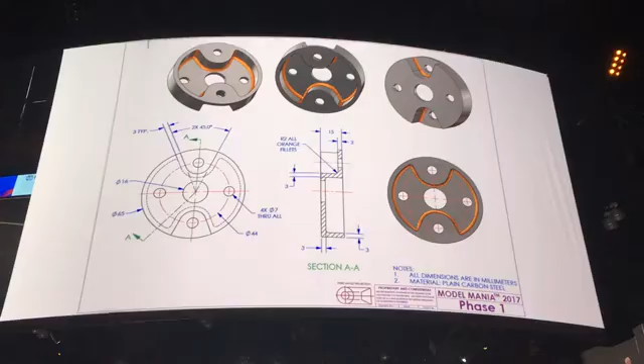This is the model, the phase one part that we give you. So as I mentioned before, we give you a drawing, we ask you to sit down and model the part. Then we'll give you a change to make to that part. So a round part's got a hole in it, 4 holes on the outside, some pockets, and then it's kind of shelled. The constant wall thickness throughout is 3.

So let's take a stab at this thing here. We'll start off with a sketch and just create a couple circles, 65 millimeters, 16 millimeters, and we're going to extrude this. I'm a big fan of using Instant 3D, so I'll just grab that sketch, drag it out 15 millimeters. What we're going to do next is create a sketch on that front plane.

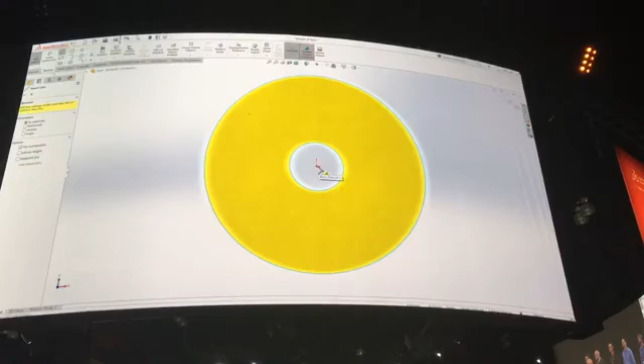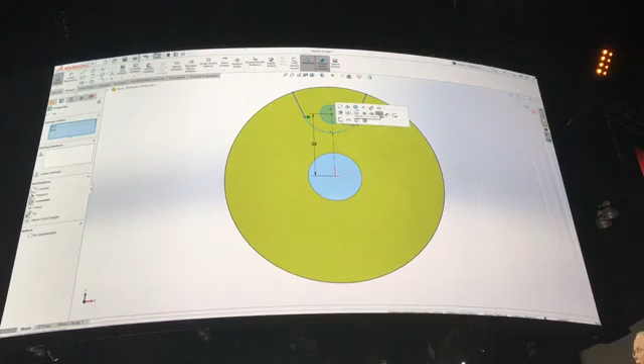I'll use a construction line here, 22, because the bolt circle is 44, and we'll draw a 7 millimeter circle to define the hole. And I'm going to convert that outer edge. That'll help me when I'm establishing relationships while I'm sketching, so this perpendicularity helps me establish that relationship. Transition straight to an arc right off the line command, and then we'll add a concentric relationship. I'll also add a symmetric relationship between the 2 vertical edges there as well.

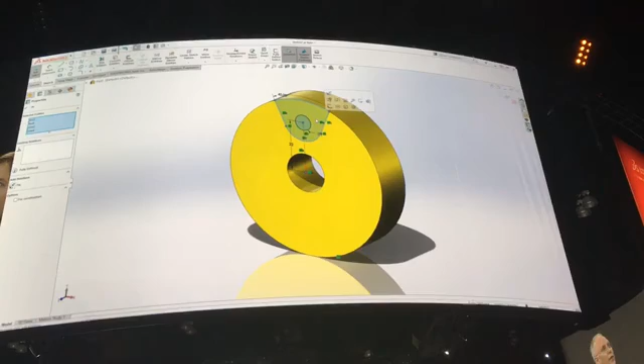Then we'll add our 45 degree dimension, and you don't need a radius on that lower arc there because you can see that that line, because of that perpendicularity, goes through the center. Trim that up, and we'll go ahead and extrude it. I'm using sketch contours, so all I have to do is choose that one outer contour, and I'm able to extrude that right to the back face. Actually, not to the back face, offset from the back face by 3 millimeters.

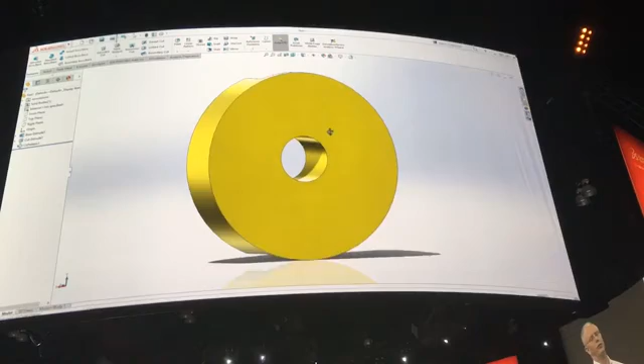So then what we'll do is circular pattern. I'm going to pattern that around to the bottom side too. That's the way I guess to do it. Some people did mirrors, some people did different things. It might have caused some challenges. Here I'm going to shell, so I'm going to shell out the bottom and the hole. That still gives me a 3 millimeter wall, but it gives me everything that I want by shelling that face

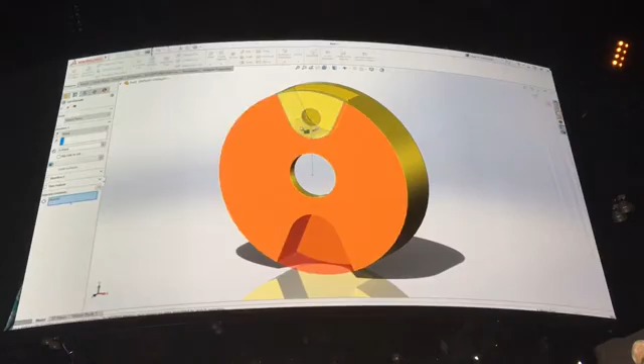to define the hole. Here I'm just going to access, using breadcrumbs, the sketch. So I'm going to access that sketch and then use that contour to extrude that hole through all, and we'll pattern that all the way around to the bottom side, or make 4 of those around to the bottom side.

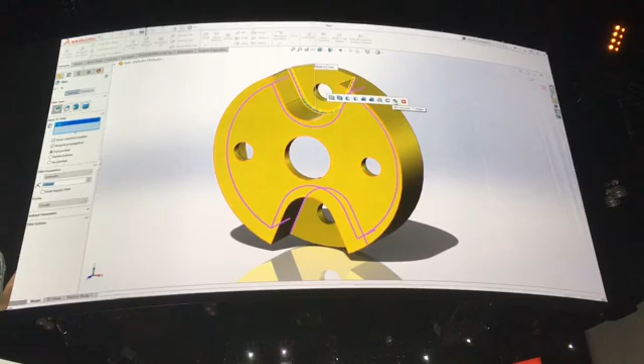All right, fillets. So this is a machine part. If you notice, all the concave edges were filleted. So I'm going to use the selection manager to choose all concave edges. Kind of a one-button click. It allows me to create all those in one shot. I don't have to worry about grabbing a whole bunch of edges or features to fillet that. You don't have to add the color. I like to add the color because it helps me visualize that.

Very important, you got to apply the material. In this case here, plain carbon steel. And that's it, phase 1, done. Pretty simple. I don't know how many features we got, 6, 7, everybody's counting, 7 features, not too bad.

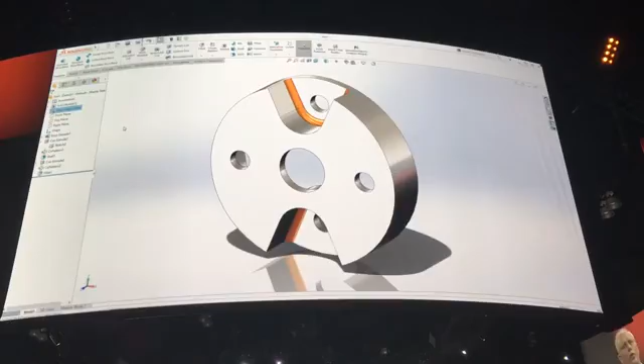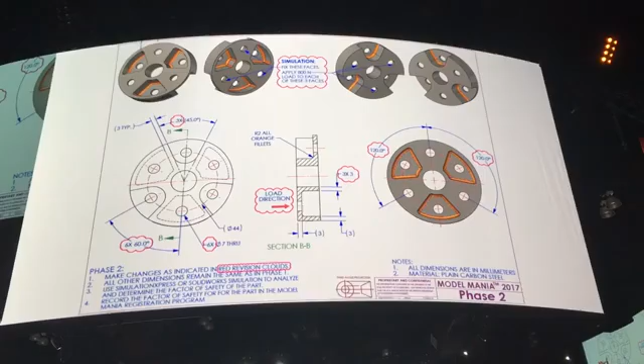So, once you're done with that, we give you this other drawing and say, all right, now you got to make a change to it. 4 holes goes to 6. The pockets that are on the front side here in the lower left view go from 2 to 3, and then the shelling in the back kind of takes place. But if you look at that view on the right, those pockets have the edges that go into the center as straight lines. And when you shell that, you'll see later on a way to get around that.

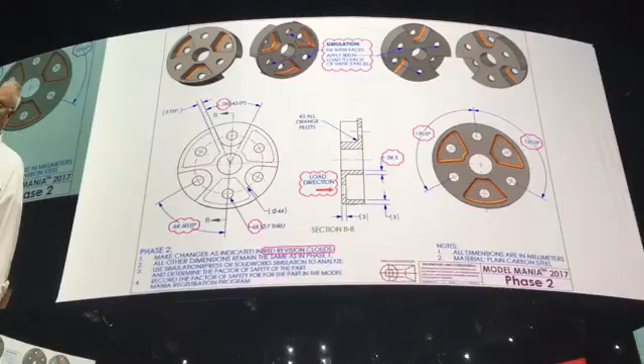And then we define the simulation, which faces to hold and which faces to apply the load. We got those nice bubbles, and we give you the load direction in that center view and the section view. So let's get started on this. Let's go and change the number of holes in the pattern from 4 to 6. No problem, no rebuilds. From 2 to 3 here. No problem, everything still looks pretty good.

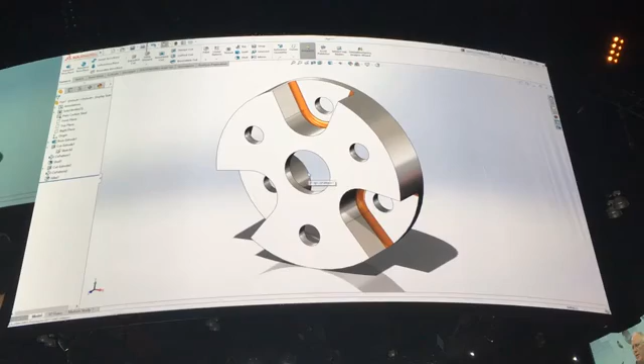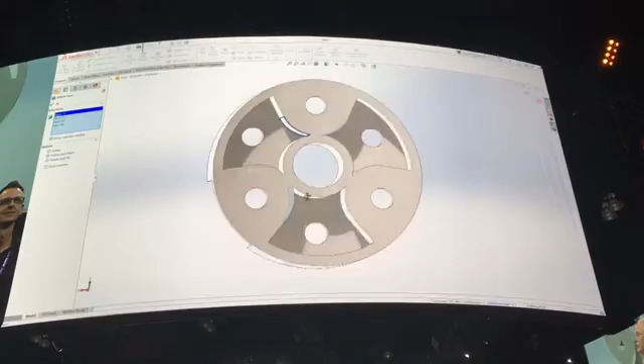We'll take a look at the back side. And here what we want to do is change our shell. So we're actually going to remove that face. So we're actually shelling that material. And there's some geometry that needs to be filled in, namely around that face. So I can model that geometry, but here I'm just going to choose to use the delete face command, and it's going to delete that face and repair that and actually patch that up for me. A real quick, easy way to get rid of that material.

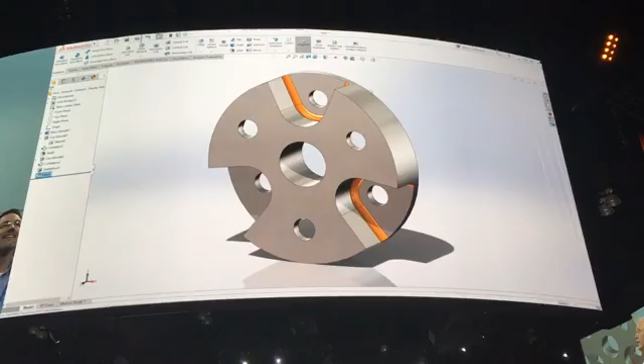So now what we got to do is repair our fillets. Again, I'm just going to clear selection here. This is the machine part. We're going to run a ball end mill through there, 2 millimeters, and it'll go ahead and capture all those in one shot. So the geometry's done. Now we're going to run our simulation.

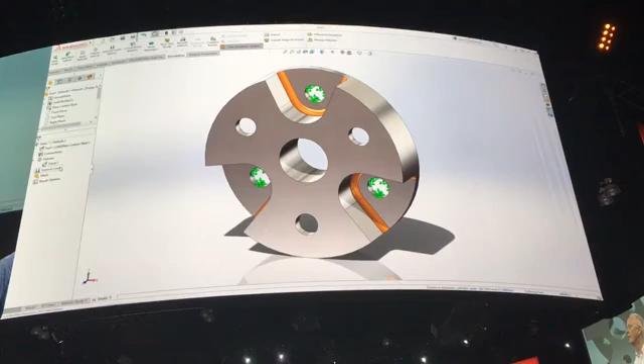New static study, pretty straightforward. Those 3 back cylindrical faces, defining those holes, we're going to hold those as fixed. And then the 3 cylindrical faces on the front, we're going to apply a load. And the direction of that load is going to be into the part based off of that front face. There were a lot of people that applied a radial load on those holes, and that's not really what we wanted there. 800 newtons per item, and we'll reverse that direction. Last thing we get to do is run it.